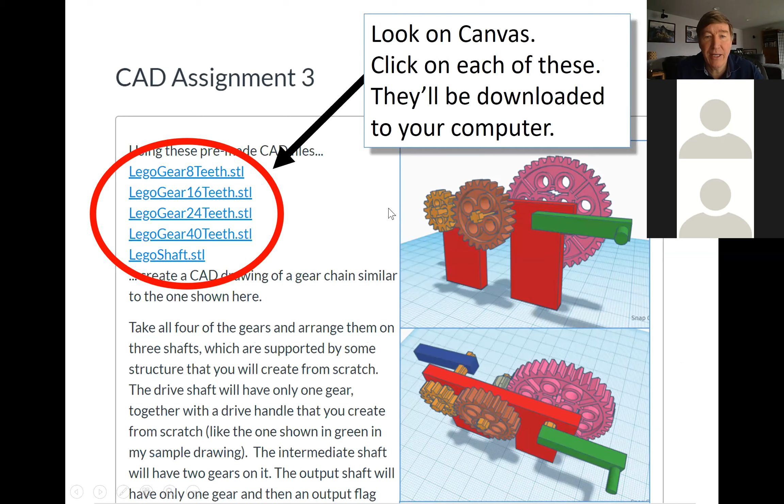Okay, it does. So when we did the finish the gearbox part, on your diagram it had like a crank and another thing at the end. I called it an output flag. Yes. So do we have to put that on there as well? Yeah, I would like that. Okay. Let's see, let me skip through these. Okay, so what you see here is a copy of what is on Canvas. I trust you guys have already looked at it. Okay, so you see the files are right there. All right, so yeah, this output, or the crank here, I definitely do want that included, because when you calculate the gear ratio, I need to know which shaft is the input shaft and which one is the output shaft, because the gear ratio is going to be very different depending on which one it is.

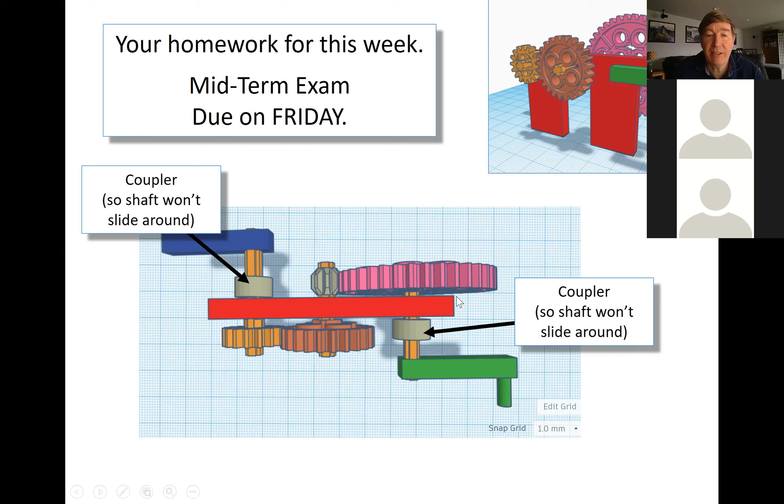In fact, tell you what, let's just jump ahead to that. Okay, all right. So like in this example right here, the shaft on the left is the drive shaft, and so the one in the middle here is the one that's being driven. Okay, so if this guy's got 40 teeth and that guy's got 8 teeth, that means the multiplication factor here is going to be 5, because 40 divided by 8 is 5. So that means every one time that the big guy spins, the small guy is going to spin 5 times. If you had reversed that, if this guy right here was the drive shaft and this guy right here was the output shaft, your gear ratio would not be 5. Your gear ratio would be 1/5.

Okay, because if this is where you put the crank, every time you turn the crank one time, the output shaft would only turn 1/5. Okay, so it makes a big difference. So yes, I do need to know which one's your drive shaft, which one's your output shaft, and the best way to show that is by putting a handle on the drive shaft.

Okay, so Sky is asking if you could use more than 4 gears? Yeah, I'll allow that. That would be kind of interesting, in fact, to see what you guys come up with. So you have to have at least 4. But if you want to do more, yeah, I will allow that. Okay, any other questions?

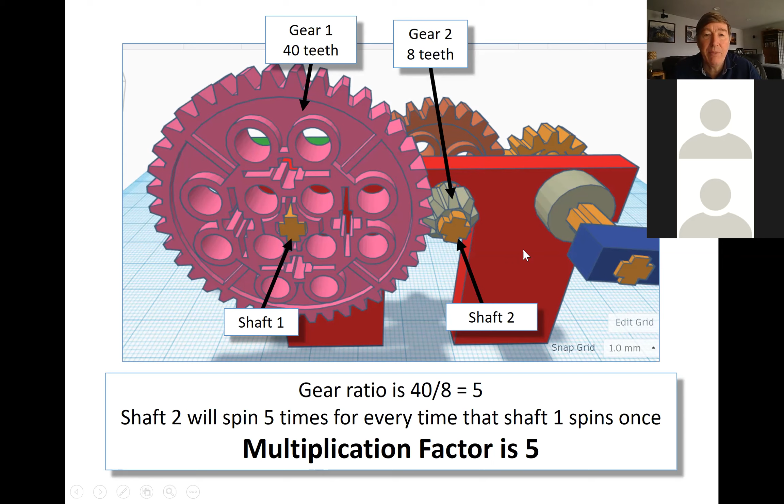Okay, so tell you what, I'm going to just briefly go over a couple of things that other people might want to know. So the people who are not online right now, they might possibly want to know this. So let me go back up here.

Let's start with the questions on the quiz, which, by the way, one of you did not get a perfect score on this quiz, and I don't know how you could possibly miss these. I mean, these questions are intended to be super easy, and all of you except for one got a perfect score, but one of you did not. Oh, and by the way, 2 students did not take the quiz. Oh, we got to do something about that. Okay, so what is due on Wednesday? Well, nothing. The assignment's due on Friday, but I definitely wanted everybody to have tried it by today. Okay.

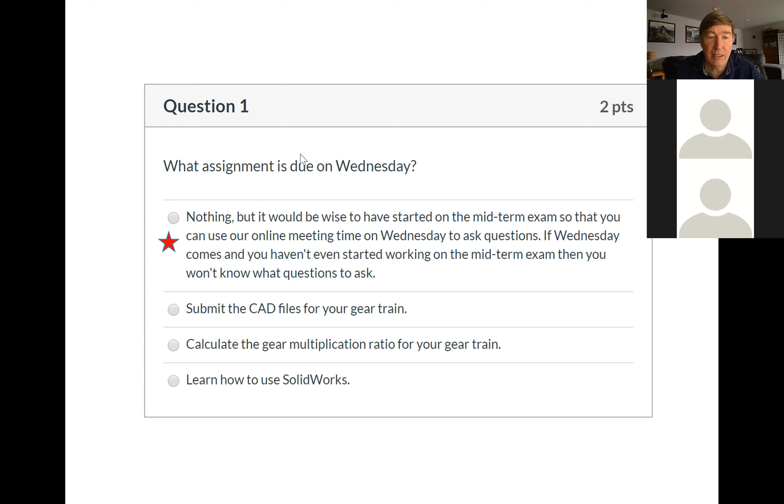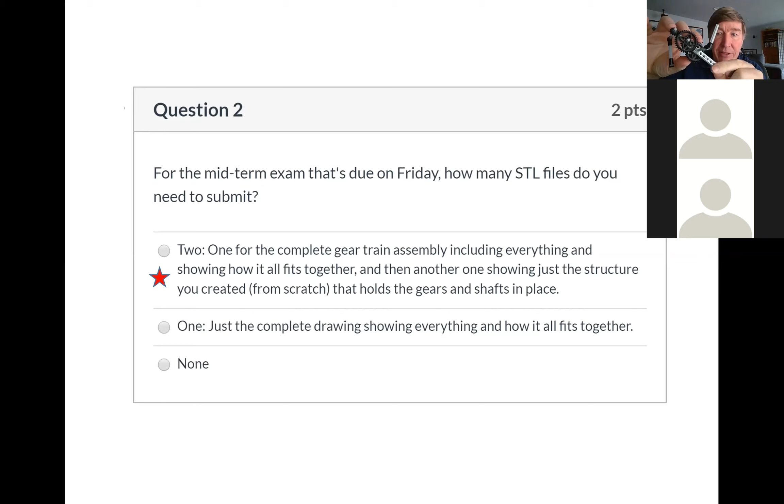Okay, so for the midterm exam, how many STL files do you need to submit? Okay, 2 of them. And make sure, I want everybody to understand this because it's really important. One of the STL files should show the entire gear train. So this is the real type thing here. Okay, so one of your STL files needs to show the entire gear train so I can see how everything fits together, which one's your input, which one's your output, and including the support material.

But the second STL file, that should only be the support, okay, not the gears. Because my reasoning there is that's what you're going to send off to the machine shop to have made, because you're going to buy the gears, right? So you're not going to have a machine shop make the gears for you. You're going to buy them, right?

So the thing that you're going to send out to the machine shop, or if you're going to 3D print it, the thing that you're going to 3D print would be the support. And so I need to have a separate STL file just for the support. But I also need an STL file that shows how they all fit together. Okay.

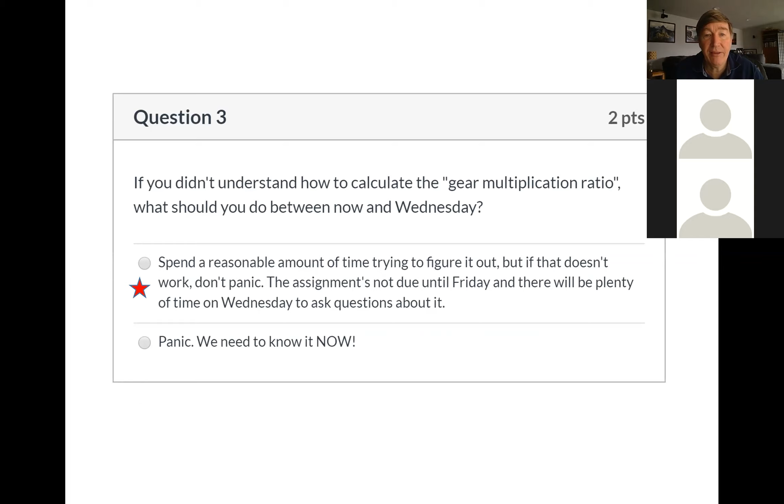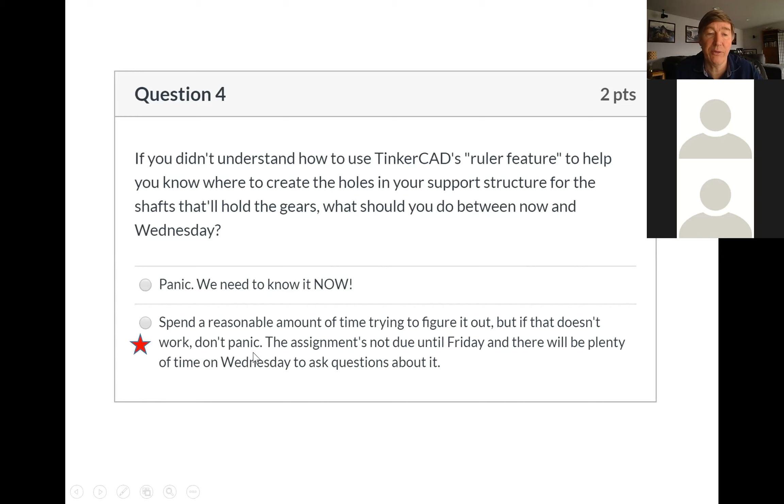All right. So if you didn't understand quite how to do everything, then I hope you at least tried it. I hope you also didn't panic. Okay. So for all of these last questions, the answer was, well, spend a reasonable amount of time trying to figure it out. But if you can't get it, don't panic, because we are going to meet on Wednesday. And so right now, here we are meeting. Okay. All right. So let's take a look at this.

So your CAD file here, actually tell you what, let me switch my sharing here. Instead of sharing the PowerPoint here, I'm going to share the actual, let's see where to go. Okay, here we go. All right. So what you guys are seeing right now is the teacher screen in Canvas. So these buttons that you see right here, you guys wouldn't have those. That's only what a teacher would have in the grader thing here.

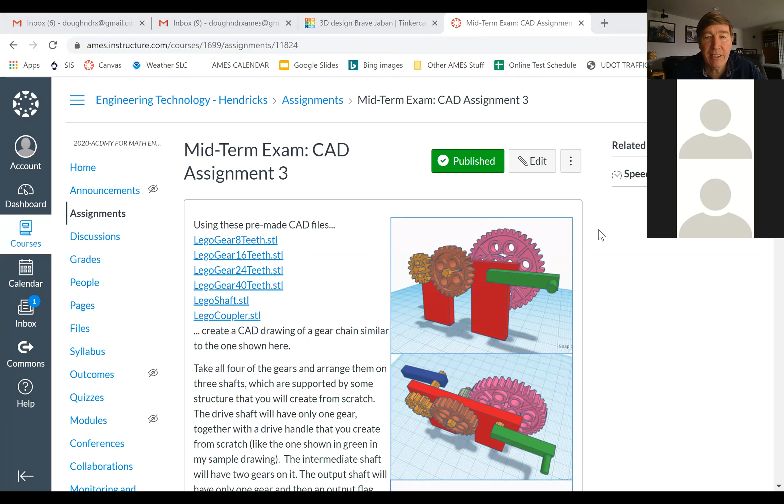Okay, so here on Canvas, I think I've described pretty thoroughly what's needed. So here's a couple of views of the completed assembly. So you can see from various angles what I want it to look like. And yes, I do want a handle, which you have to create from scratch, but that should be really trivial. And then I also want the output. Now I call it an output flag because it makes it easier.

Okay, so right here with the real thing here. If I didn't have this little piece right here, it wouldn't be obvious to me how much is turning. So watch the crank and watch the output shaft. So I turned the crank once, the output shaft only turned a tiny little bit. I have to do it twice, 3 times, 4 times, 5 times, 6 times, 7 times, 8 times. I have to turn this guy 9 times before this guy turns once. And if I didn't have the output flag on there, then it wouldn't be clear that was happening. So the output flag is actually important.

Okay, so over here I have instructions on what to do. Here I've labeled everything. So notice I've got 3 shafts, and I want yours to have at least 3 shafts. But Sky, if you'd like to do a few more than 3, hey, more power to you. And in fact, tell you what, I will give a little bit of extra credit, not a lot, but I will give a little bit of extra credit if you do more than 4 gears. And so you'd need more than 3 shafts in order to do that.

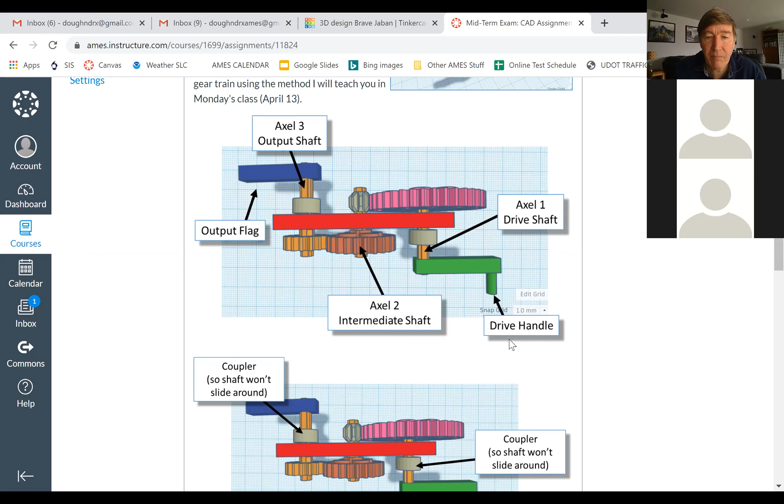Yeah, no, I won't give a lot of extra credit, but I will give a little bit, and some of you do need extra credit. Okay, so I need at least 3 shafts, a drive handle, an output flag. Okay, I do want you to use the couplers.

Okay, so the coupler that I gave you the STL file for, that coupler is a big tall coupler. So I want you to take the tall coupler and I want you to shorten it down. The rest of them, the gears and the shafts, you don't want to change the size on those. Well, the shafts, if you want to make the shaft longer, that would be okay. But for sure, don't change the size of the gears. That will mess everything up. But the coupler, feel free to go ahead and shorten that up if you want.

And so when I put it on here, I'm not actually using it as a coupler, because remember what we talked about with a coupler? A coupler is if you have two shafts and you want to stick them together. That's not actually what I'm using this for. The reason I'm putting the coupler on here is just so that the thing doesn't slide around. Okay, so here's my real thing. This thing here is what I'm calling the coupler.

If that thing wasn't there, when I crank, you see what might happen here? It slides around like that, causing problems. So here I crank and nothing happens. So I need something to keep it from sliding around. And so what I've done is I've taken a coupler, a really short one, and I put it there. So it's not really acting as a coupler. It's really acting as something to hold the shaft in place, right? So if you need a long shaft, I want you to put that there so it doesn't slide around.

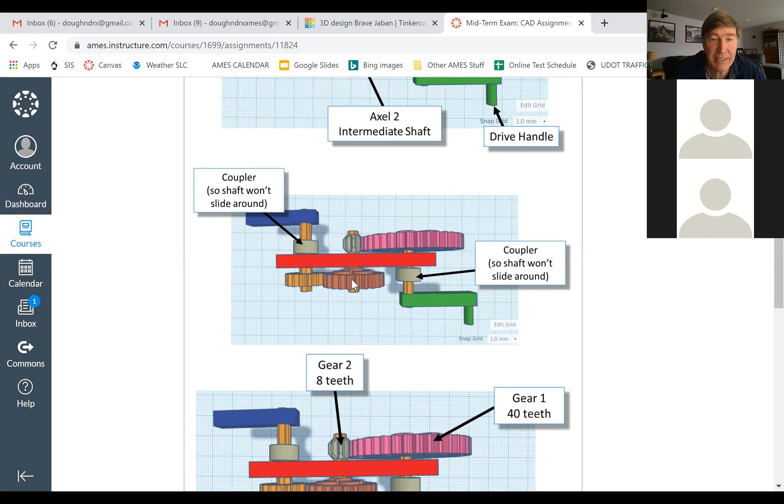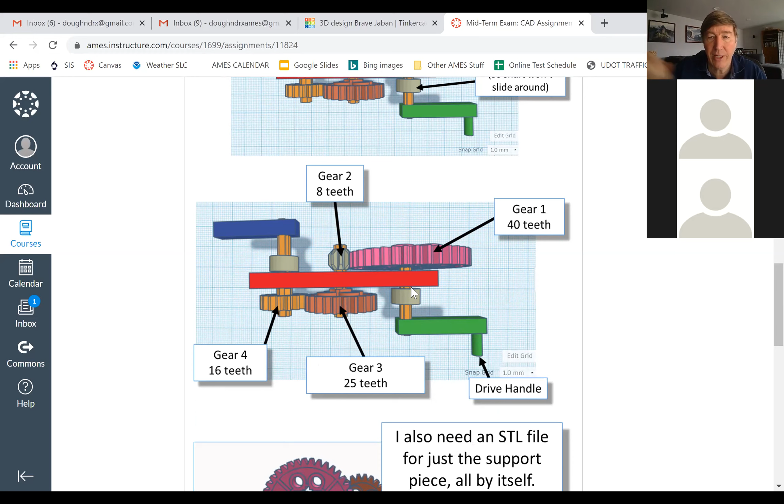And I hope you can understand why we need a long shaft, because see the output flag here: if this shaft wasn't long enough, when we try to turn it, it would hit the gear. Here maybe it's a little bit more clear in this slightly enlarged one. If this green shaft was too close to my red support plate, when I try to crank the shaft, it's going to hit the gear. And so I need the shaft to be long, and I need the coupler so it doesn't slide around.

Okay, and then like I said a few minutes ago, in addition to giving me an STL file for the entire assembly showing me how everything fits together, I also want an STL file just for the support piece by itself, because that's the thing that you would send off to the machine shop, or to your 3D printer. And you have to have a separate STL file just for that.

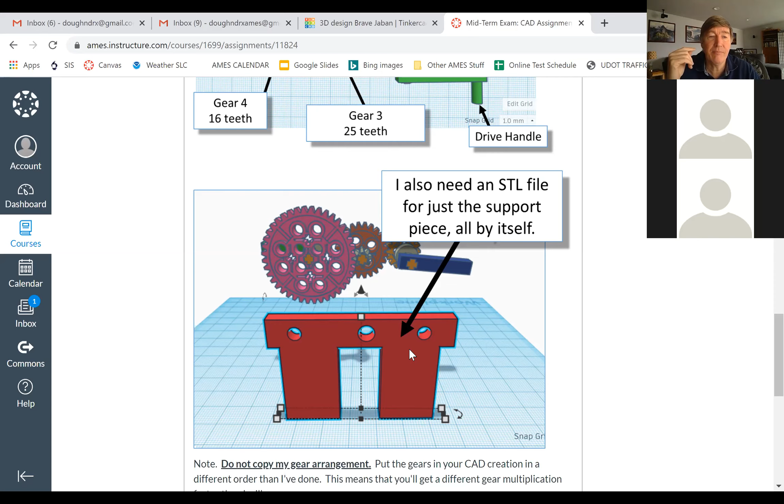Okay, now I do have a couple other things that I could talk about that I think people might want to hear. But before I do that, let me just pause for a sec. Any more questions from anybody? Now, there is one thing that I did last time where I used the ruler to help figure out where the holes should go. And after the class was over, it occurred to me that there's a way easier method. And so I'm going to show you that easier method. But before I do that, let's see.

So Danny is asking, can the gears be arranged? Not only can they be arranged, but they have to. You see what it says right here? It says, do not copy my gear arrangement. I do not want you to give me an exact copy of what I did. I want you to rearrange the gears. So you're saying have the 25 tooth with another one? Yeah, absolutely. Do not copy my gear arrangement. Come up with your own.

Okay, so unless anybody has any more questions, let me talk about that one thing where last time I tried to use the ruler and it was a little awkward, and then afterwards I said, there's a way easier way. So let me go back in here to my share thingy.

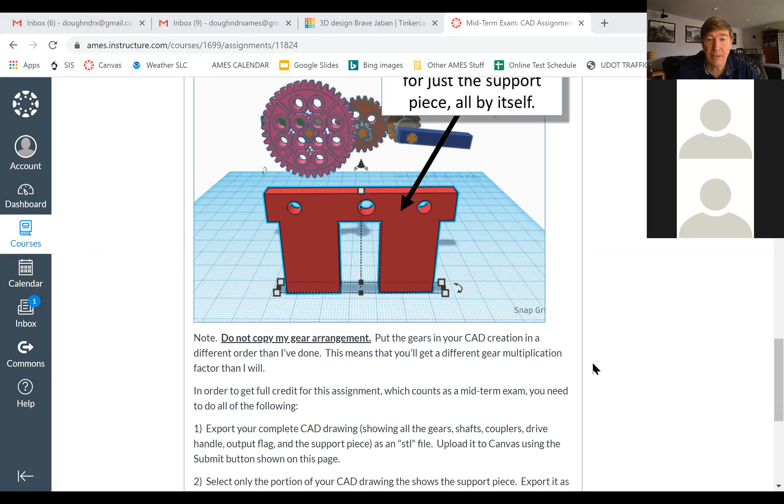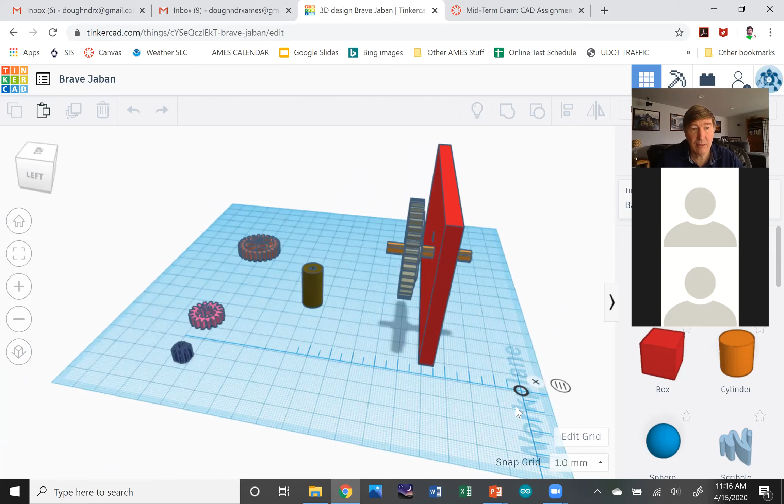If it'll let me, come on. I've got too many windows popping up here, making it difficult. Okay, here we go. Let's see, where'd it go? Oh, I see what the problem is. All right. So now, are you guys seeing the Tinkercad now? Okay, good.

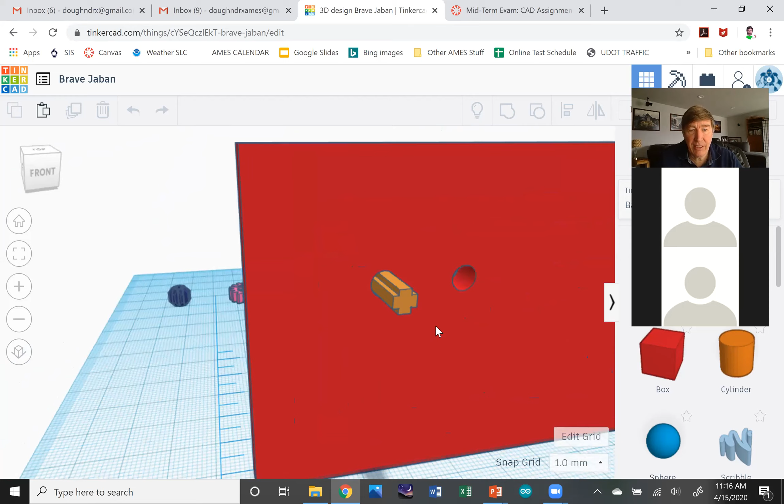So let's say that I've got a problem, which I've purposely done something here that has a problem. You see my support structure. I've got two holes. One of them has the shaft in it, and that's got the gear on it. And so I've gone ahead and created another hole, and I purposely put this hole in the wrong place. And I hope you guys can see what the problem is. If you look through the hole, you can see the gear there. So if I come over from the other side here,

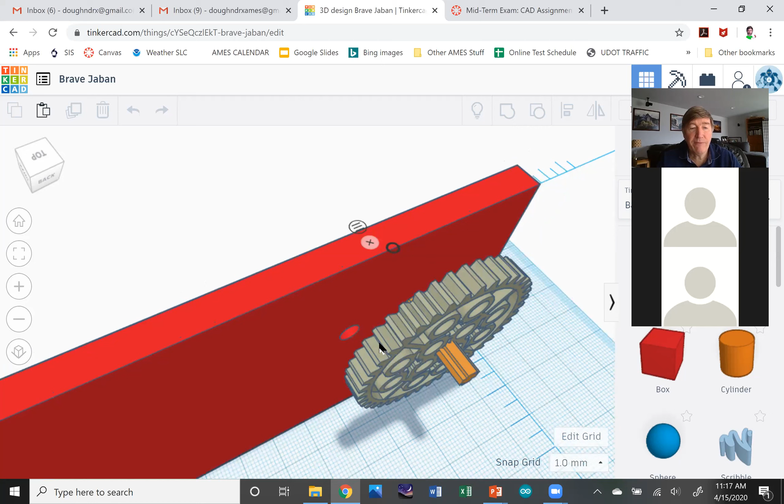you see I won't be able to put another shaft in that hole there because of my gear, you can see clearly here, right? This hole is too close to the first hole. I can't fit a shaft in there because it's going to hit the gear. So what I need to do is figure out how far apart those holes should be. Well, the first thing that I need to do is figure out which gears am I going to use. So let's come over here.

I'm going to center it on that guy. Okay, so let's say that this is one of the gears that I want to use. And let's say I want to use the big gear as my other gear. So let me import that other big gear there. Okay, so I'm going to come over to import, choose a file.

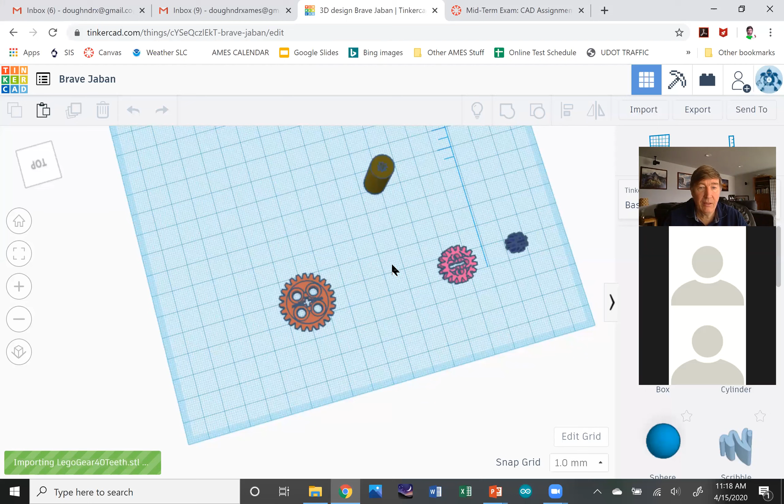Here's the folder where I put the parts in. So I'm going to take the big gear, the 40 tooth gear, and I'm going to import that one. Okay, it's thinking about it for a second. There it is. There's the big gear. Okay, so now let's say that the two gears that I want to use are these two. All right, so I need to position them next to each other like that.

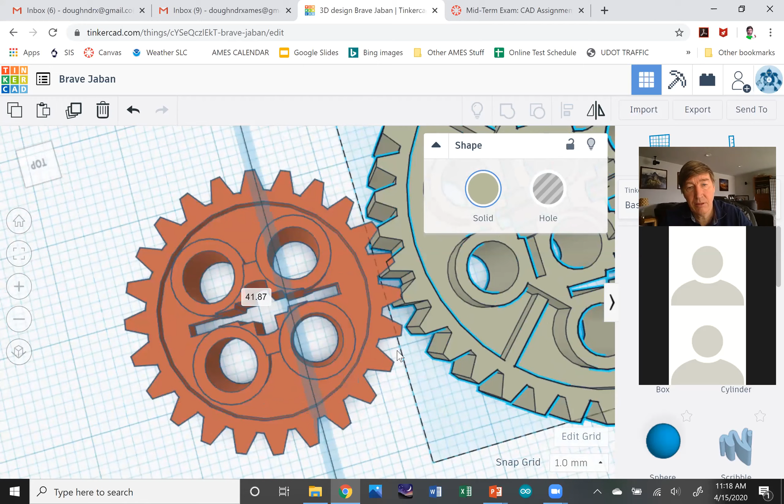And then I want to zoom in to make sure that the teeth are fitting properly. So, okay. So you can see that they're not quite where I want them to be. So let's, okay, there, okay, that looks good. Okay, the teeth are fitting properly. Okay, so what I want to know then is how far apart should I make the holes so that the shafts will be right.

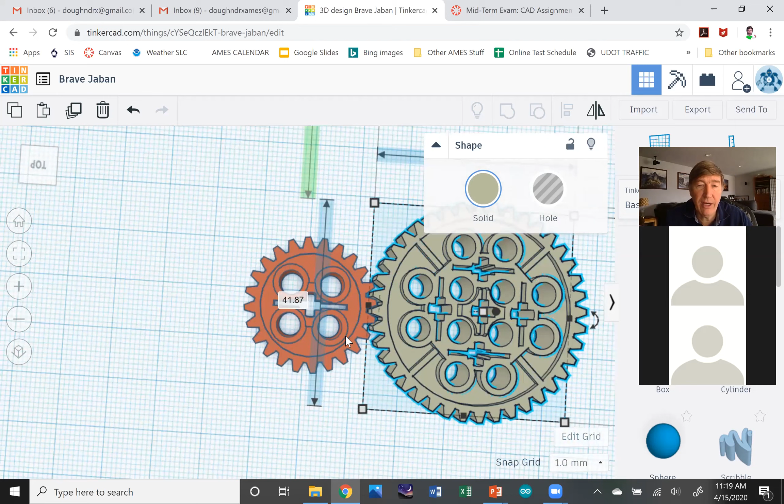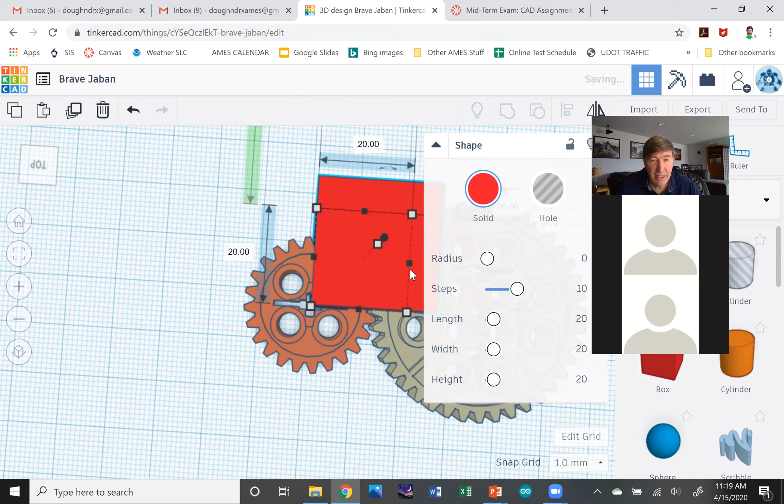So last time what I did was I used the ruler and it was really awkward. And then afterwards I said, well, duh, there's a much easier way. So here's the easier way. What I'm going to do is I'm going to grab this square here. I'm going to pull the square in. I'm going to position it so the left edge of the square is right in the middle of the shaft on the left gear. So if I zoom in there, you see, okay, so the left edge of the square is right where I want that axle to be, okay?

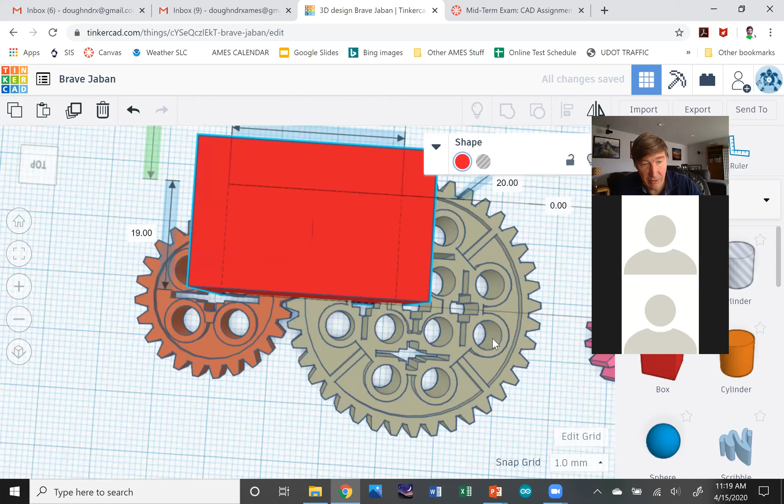But the right edge is not. So what I'll do is I'll just drag this and I'll pull it over there until it is. Okay, and let me change my positioning. Let me zoom in a bit there. Okay, looks like it didn't quite come far enough, so I'm going to do a little bit more. Okay, so I'm thinking, okay, that looks good.

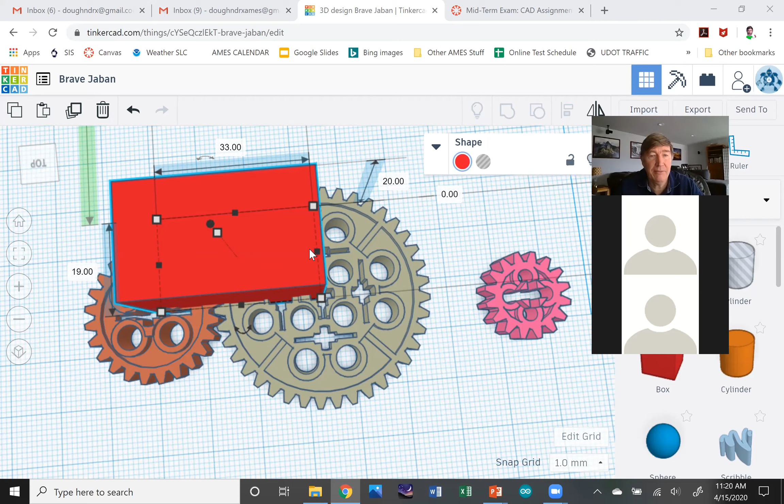All right, so now if I want to know how far that is, what I can do is I can just zoom back out a bit and look right there. It tells me exactly how far it is right there. So I can use this square as a ruler. And it turns out it's a lot easier to use than the built-in ruler. Okay, so I want those holes to be 33 millimeters apart, okay? So then what I can do now is I can come back over to here.

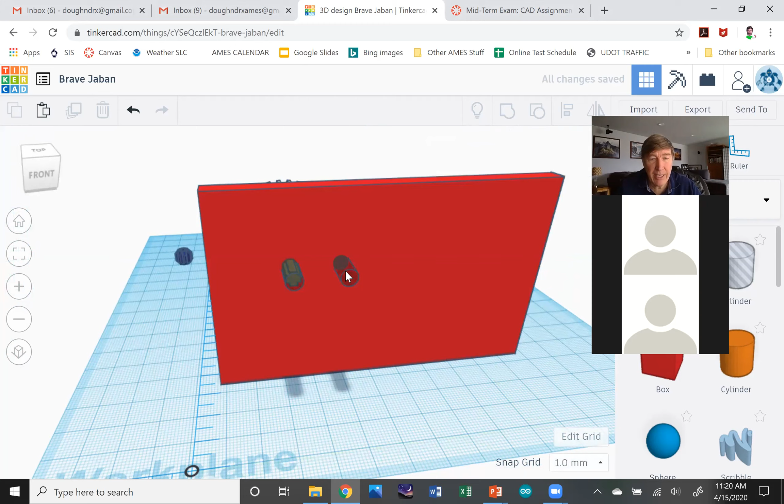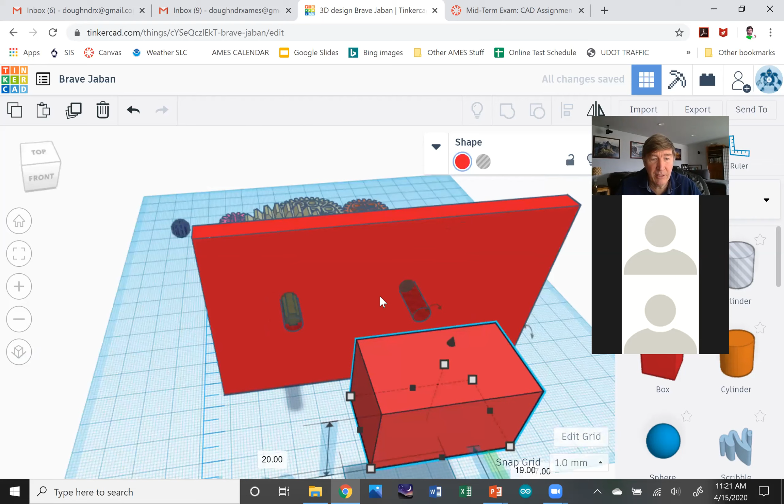And so then I can take that hole right there. And now I'm going to have to ungroup it here. Okay, so I've ungrouped it. So now I'm just going to take the hole and then slide the hole over there. And then I can take my block here and I can bring him over and use him as a guide. Oops, come back here. Okay, I need to lift him up there. Okay, so you guys see how this works, right? So I can just bring him right in there and use him as a guide so I get this hole positioned exactly where I want it to be.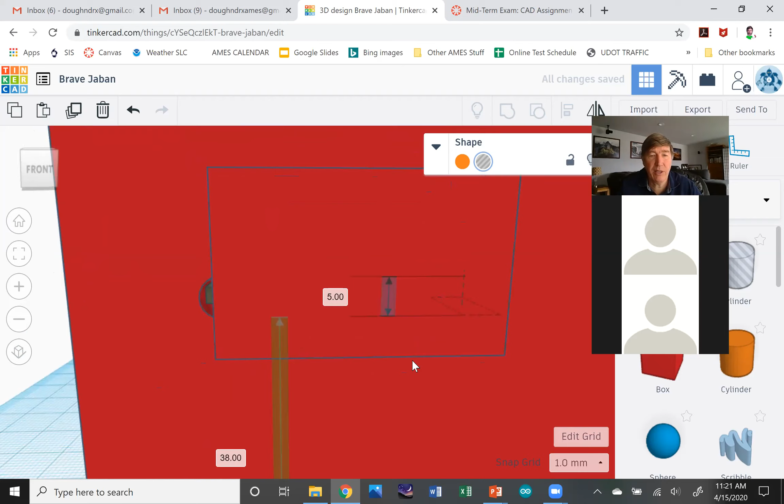And let me zoom in. If you're zoomed out, it's hard to grab it and move it. Okay, so I can put this guy exactly where I want him to be. Okay, and now I get the big square out of the way. Whoops. Okay, get him out of here. Okay, and then now make sure that these holes are lined up. So I'm going to click the one hole, I'm going to hold the shift key, click the other hole, and then I want to align these guys, okay.

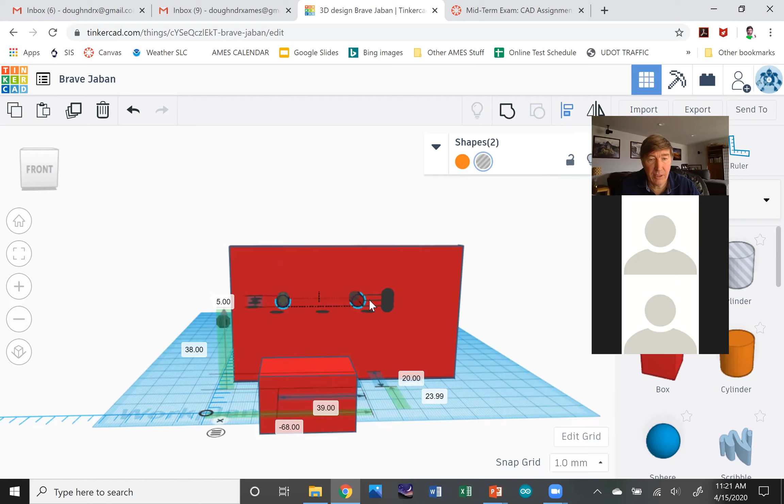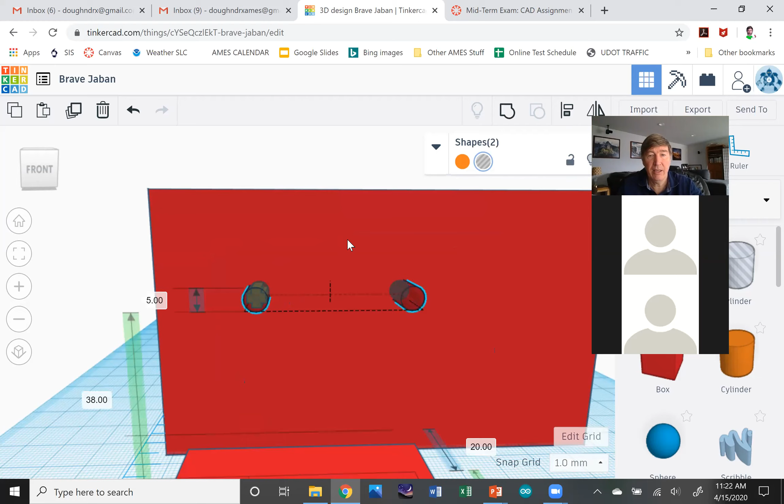Let's see, why is that not working? Let me zoom in a bit here. Okay, click him, click Align, okay, and then click middle, since they're the same size. Okay, so now I know that they're exactly even with each other, and now I know they're the right distance apart. So now what I can do is click here, click here, click here, group them back together again, and voila, life is good. So I got my holes where I want them to be.

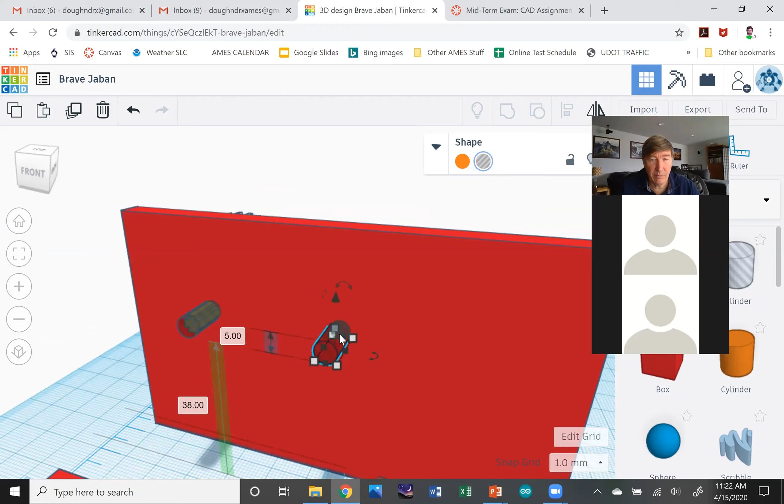Okay. Looks like I messed up on my hole there. Let me ungroup this. I must have changed the shape of the hole when I was dragging on it. I need to push him back in there. Okay. All right. So anyway, so now we should be good. All right.

So how about gear ratios? Does anybody have any questions about gear ratios? Do you understand how that's supposed to go? Could you calculate the gear ratio?

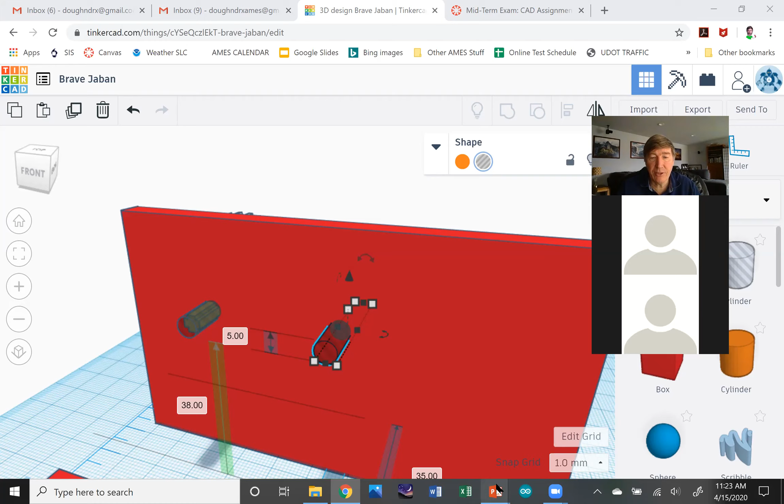Okay, so does the no mean no, you don't have any questions? Oh, you're still a bit confused. Okay. All right, so let's go back here. Let's talk about gear ratios. Let me go back to my PowerPoint slide.

Okay. Okay, or not. Hang on a second here. Was that not the PowerPoint slide? Why does it not want to? Why is my screen locked up here? Okay, hang on a sec while I try and figure out why I'm not getting what I think I should be getting. Okay. All righty, let's try this now. Okay.

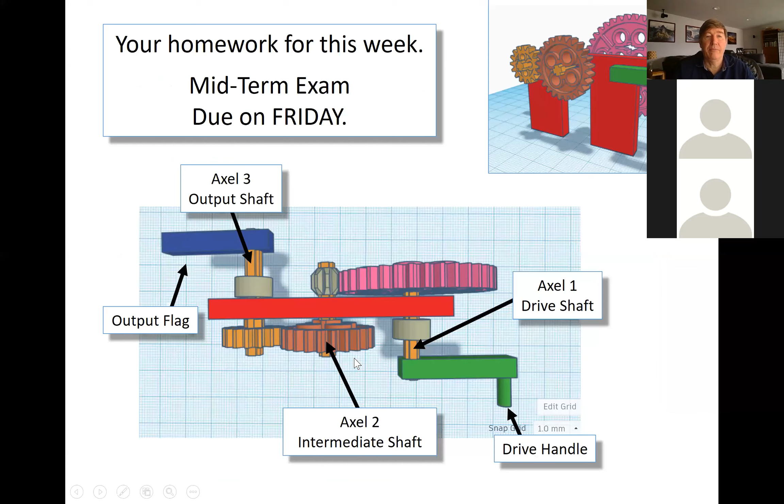All right, so let's talk about gear ratios. What you're looking at right here is the one we talked about a minute ago. If I just look at these two gears right here, forget the guy over on the right, just look at these two. So if this big gear has 40 teeth and this small gear has 8 teeth, that means that when the big guy goes around one time, 40 teeth are going to pass by this point right here. And every time a tooth passes this point, it causes one of the other teeth on the small gear to go.

So if 40 teeth pass by here for one full revolution, that means 40 teeth have to go by for him. So he is going to spin 5 times. So if you only look at these two gears, the gear ratio would be 5. When my big guy turns one time, my small guy turns 5 times, right? I hope that's straightforward. But this is only one piece of the bigger part. So we need to worry about these guys on the back.

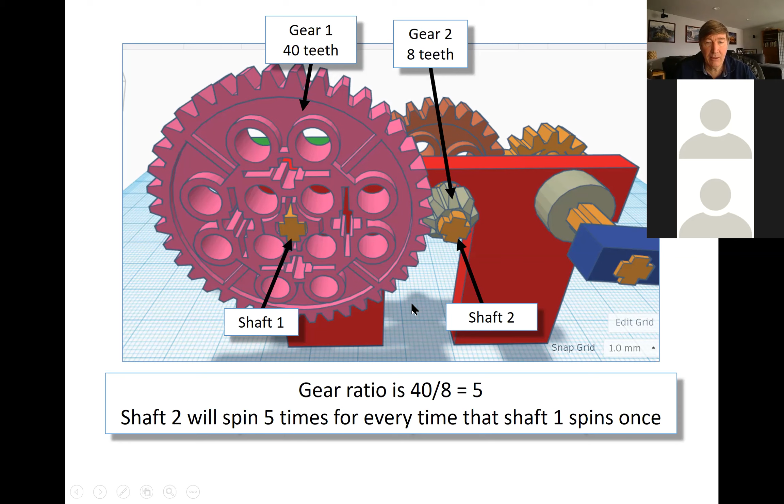I'm going to come around to the back side now. Okay. So now we're looking at the back side. These are the two gears there. Again, we have to figure out what's the gear ratio for these guys by themselves, and then we'll combine it with the other guy later. So you look at how many teeth they have. The big guy is the one doing the driving now, because this was the real drive shaft, but the real drive shaft drove the intermediate one, and now the intermediate one is going to drive the third one. So this guy is doing the driving of that one.

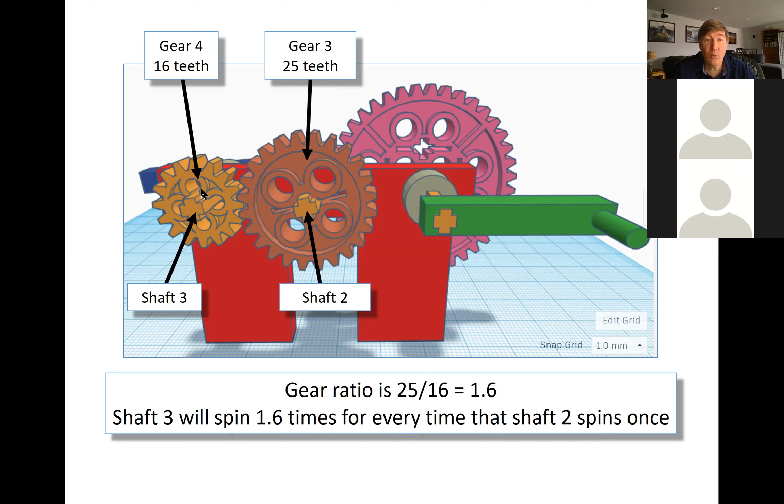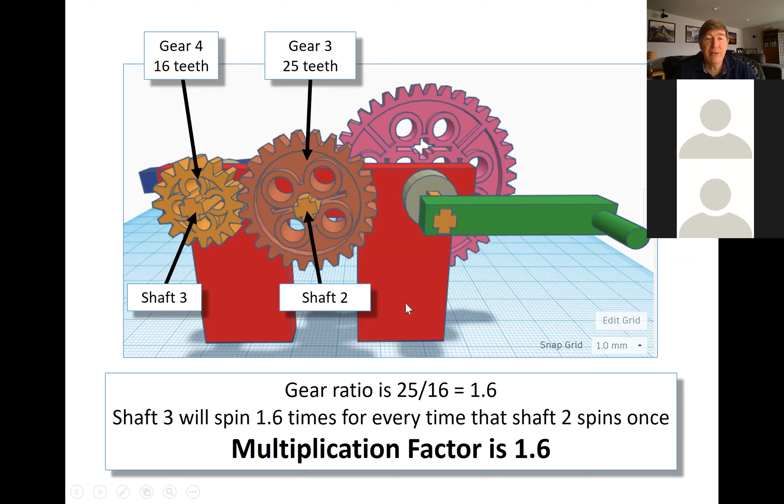He has 25 teeth. This guy only has 16 teeth. So if we divide them, we get a ratio of 1.6. It means every time this guy goes around once, the smaller guy will go around 1.6 times. So the multiplication factor just for these guys by themselves is 1.6. But wait a minute, they aren't by themselves. This is my drive shaft. The first pair of gears is connected to the second pair, so what we have is a compound gear train.

So I have to multiply the multiplication factor for the first guy by the multiplication factor for the second guy. So 5 times 1.6 is 8. What that means is if I turn my crank handle one time, my output shaft here is going to go 8 times. So my multiplication factor for my gears here is 8. Now, what if I switch that around? What if instead of making this be the drive handle, I have this be the output shaft?

So you see how I have a little handle here that I didn't have before. I didn't take the handle off of here. I was lazy, I left it on. But this thing that used to be the drive shaft is now the output shaft. So now the small gear is driving the big gear, and the multiplication factor is not going to be 1.6 anymore. It's going to be 1 divided by that. And then over here, after this guy gets driven by the one on the left.

And so now my little gear is going to drive my really big gear. So the multiplication factor here is not going to be 5 anymore. It's going to be 1/5, because every one time this guy goes around, this guy only goes around 1/5 of the time. Okay, so the multiplication factor then is no longer 8. The multiplication factor is now 1/8. So what that means is, every time that my input handle, my drive handle, my crank here goes around once, my output handle is only going to go around 1/8 of a turn. So instead of gearing up, now I'm gearing down.

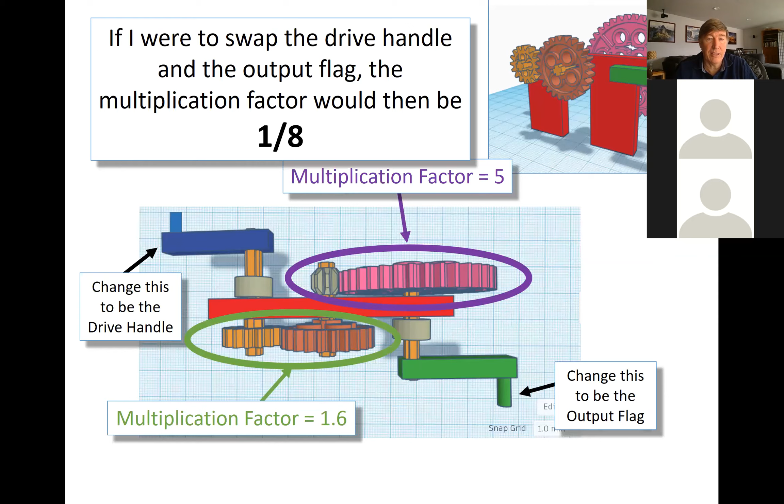Okay, then. All right, so let's talk about what's going to happen on Friday. Before Friday at 11, so by 10:59 on Friday, you need to submit to me your files. So let's go back up here again. Oh, not up here. Let's go down. Okay, hang on a sec. All right. So remember, in addition to the STL file for the entire assembly, I also need a separate STL file just for the support. So you need to send me both of those STL files, and you need to calculate the gear ratio. So you need to submit that by Friday at 11 o'clock.

Now, on Friday, I do not plan to introduce any new material. All I'm going to do on Friday is come online in case anybody has any questions. If nobody has any questions, I'm going to say, okay, guys, and basically no real class on Friday. And I'm not going to give you any homework on Friday, and I'm not even going to have a quiz on Friday. So Danny is saying, really? Yep, really. When you guys take a major test like that, I think you deserve a little bit of time off.

Yay. All right, so Riker, you're asking if we can talk together after class. Yes, I'll stay on after class. And if you really want it to be private, I can lock the meeting after everybody else leaves so that nobody else can listen in. Okay, so any other questions? Going once, going twice. Oh, okay, we have a question.